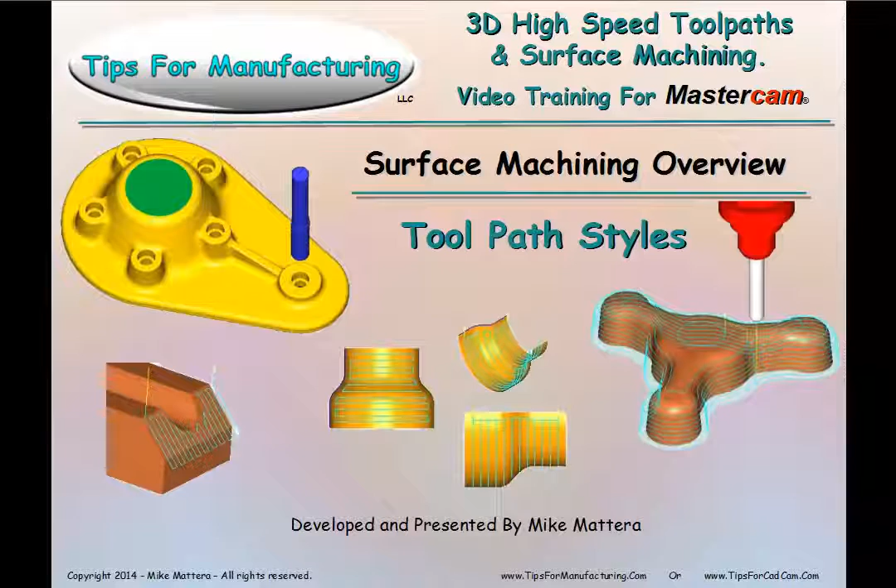We're going to start off with a surface machining overview, just to get you acquainted with the variety of toolpath styles. People often ask me, how do I know what toolpath to use? Really, variety is the key. You need to become acquainted with your choices.

See your part as a group of patterns. Look at the sample files that come with Mastercam. Most people don't install them, but they're the best way to learn about the new features in Mastercam. A great thing is, you can copy those sample operations into your part and then just reselect the surfaces.

So to find these toolpaths, we go to Toolpaths, Surface High Speed, and this is really broken up into two areas. First, we're going to talk about the roughing. Rough cuts remove the bulk of your stock.

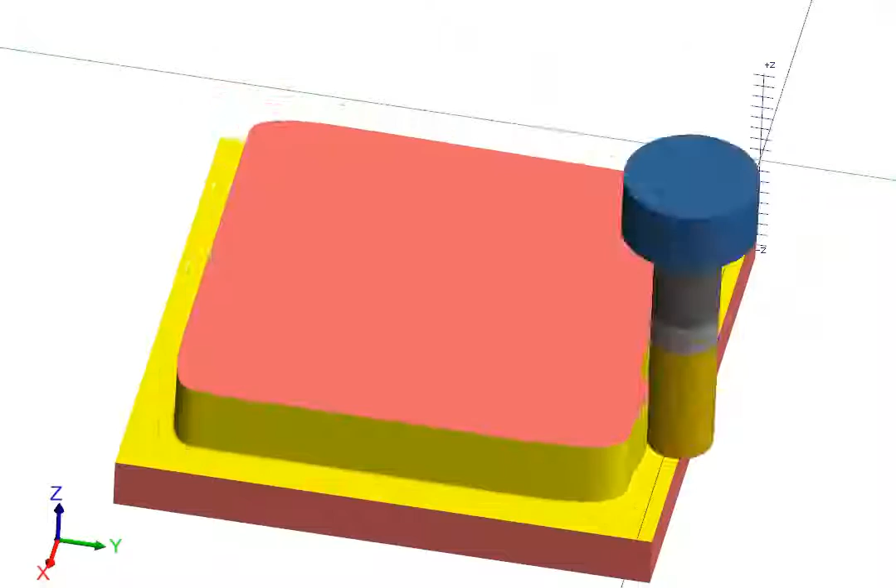Core roughing leaves a boss or a core standing up. It cuts from the outside to the inside. Area roughing is a cavity or pocket type milling. Rest roughing mills the remaining stock, getting the rest of the material.

OptiCore is like core, but optimized for machining efficiency. OptiArea is like area, but optimized for machining efficiency. OptiRest, same thing. The next area is for surface finishing.

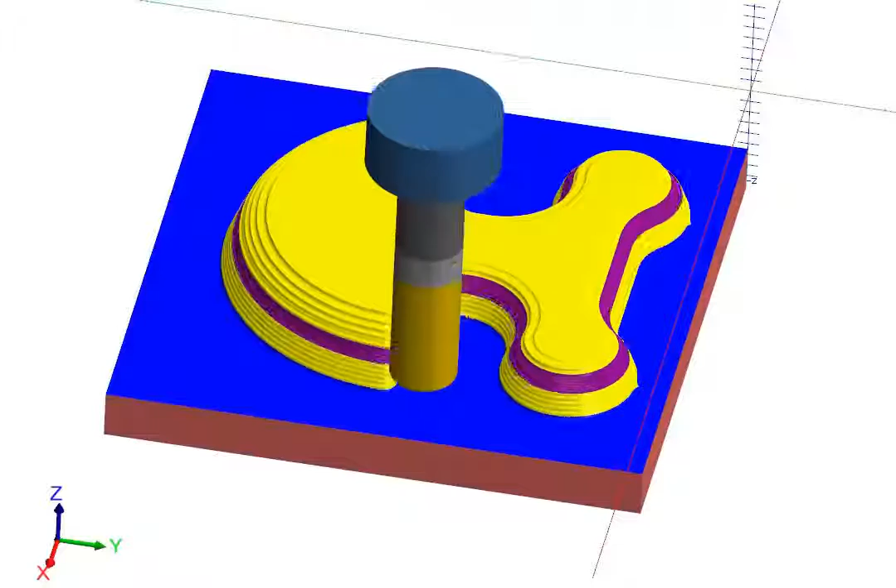Finishing cuts will smooth and blend the part. The first one is waterline machining, which is Z-level contouring. It's best used for walls that are nearly vertical.

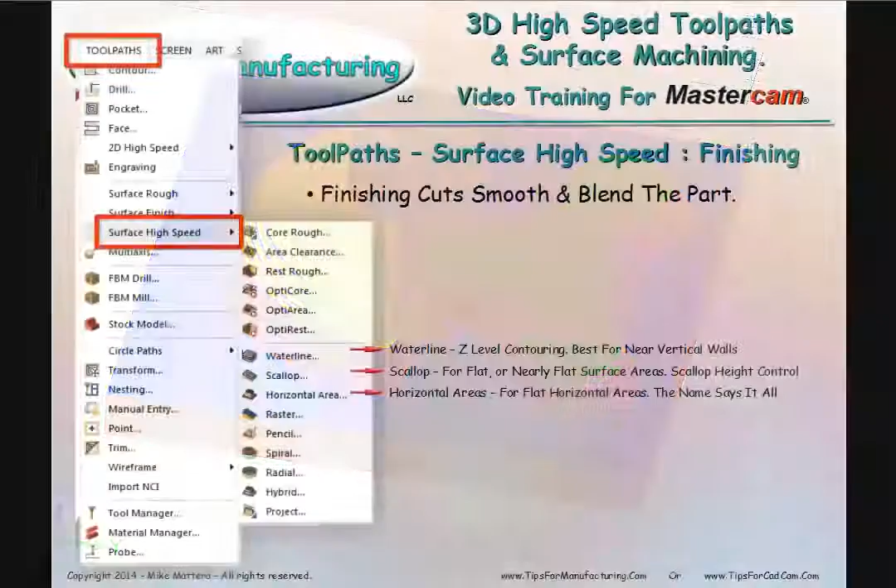Scallop is for flat or nearly flat areas, and you have complete control of the scallop height. Horizontal areas are for flat horizontal areas. They only do flat areas.

Raster makes parallel cuts across the surfaces. You control the angle of the cuts. Pencil is for tracing out or cleaning the areas between surfaces.

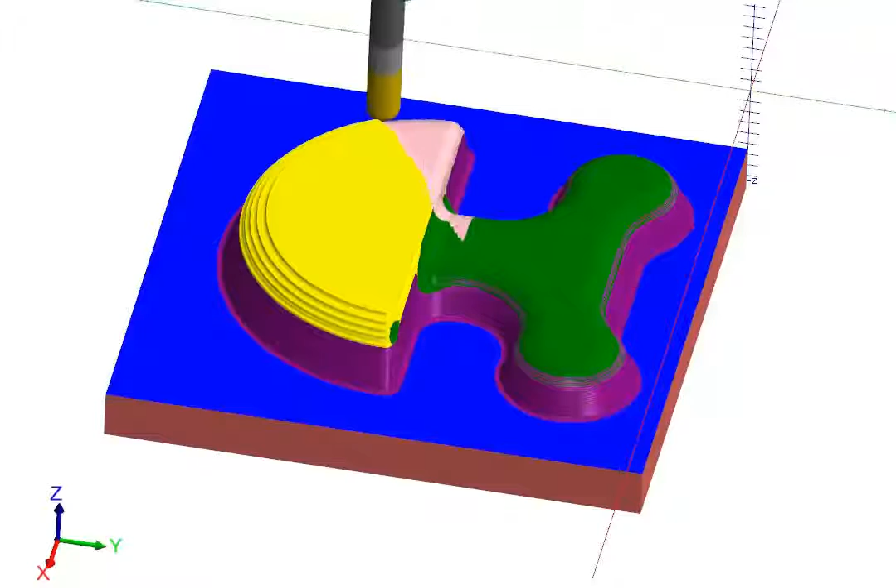Spiral is excellent for dome-shaped parts or areas. It creates a great-looking tool pattern on the part. Radial is a spoke-shaped toolpath. Think of it like the spokes in a wheel. It cuts from a center hub out.

Hybrid is a combination of toolpaths. Think of it as being scallop for doing the tops and waterline for doing the walls.

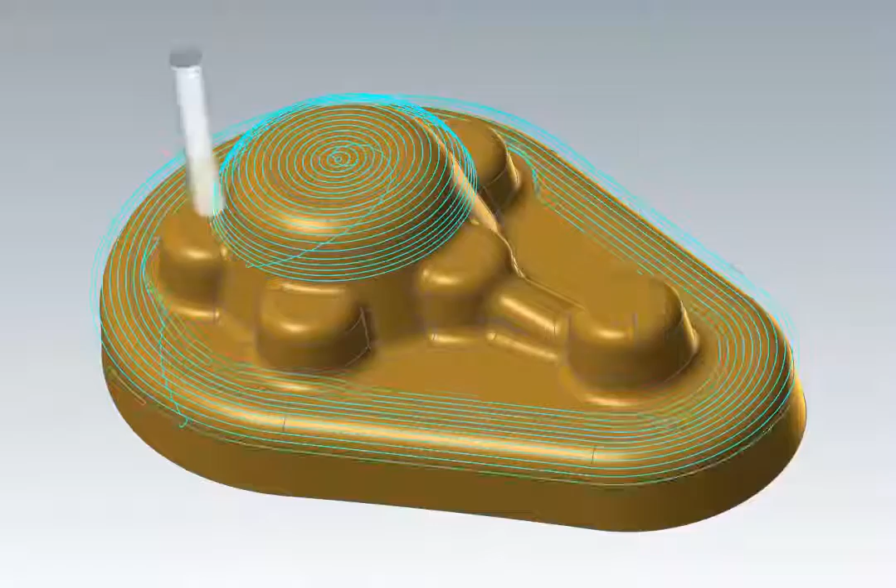And then we have project. A lot of people will say project, but that's because the English language can be pretty messed up sometimes. So this is project, as in projecting a 2D toolpath onto a 3D surface, or as a film projector would project an image onto a screen.

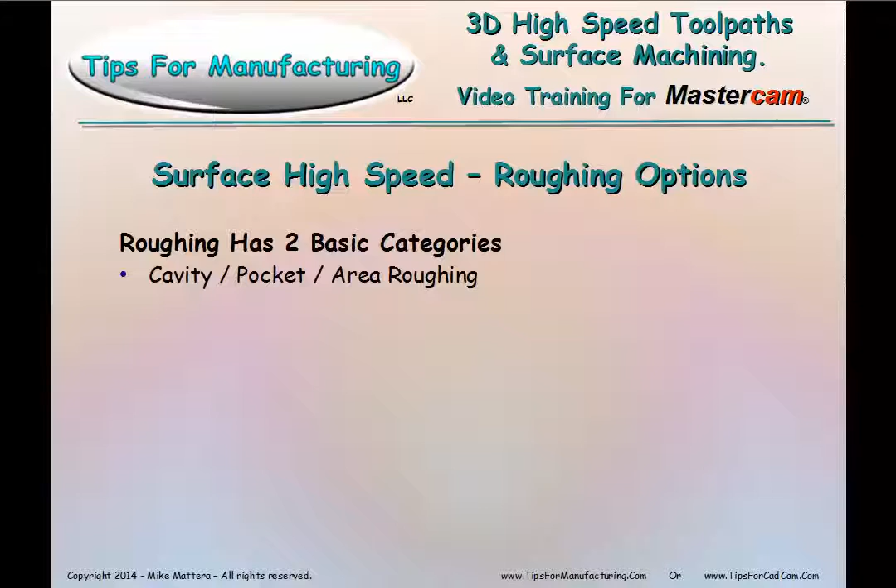So let's talk about these roughing options. Roughing has two basic categories. You have your cavity, pocket, area roughing, and then you have your core and boss roughing. That would be where you're leaving something standing, as opposed to cutting a cavity.

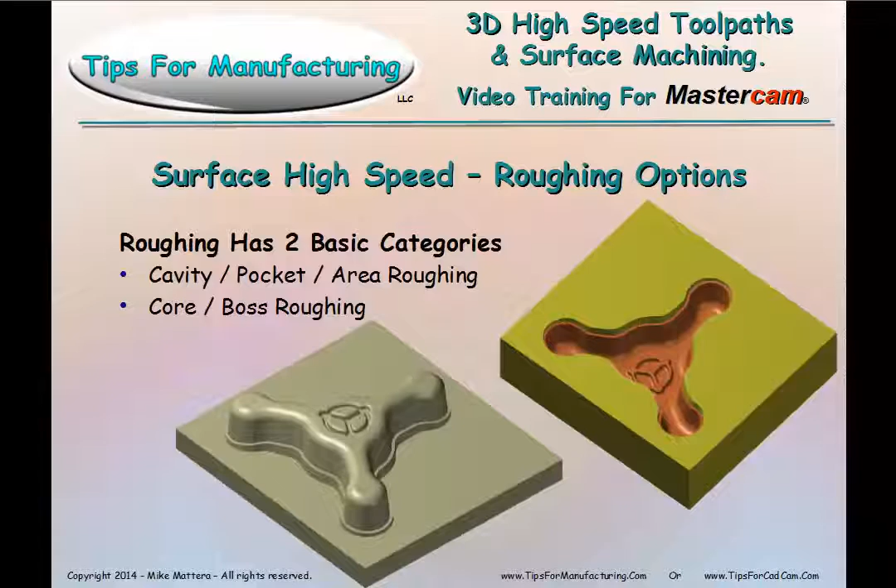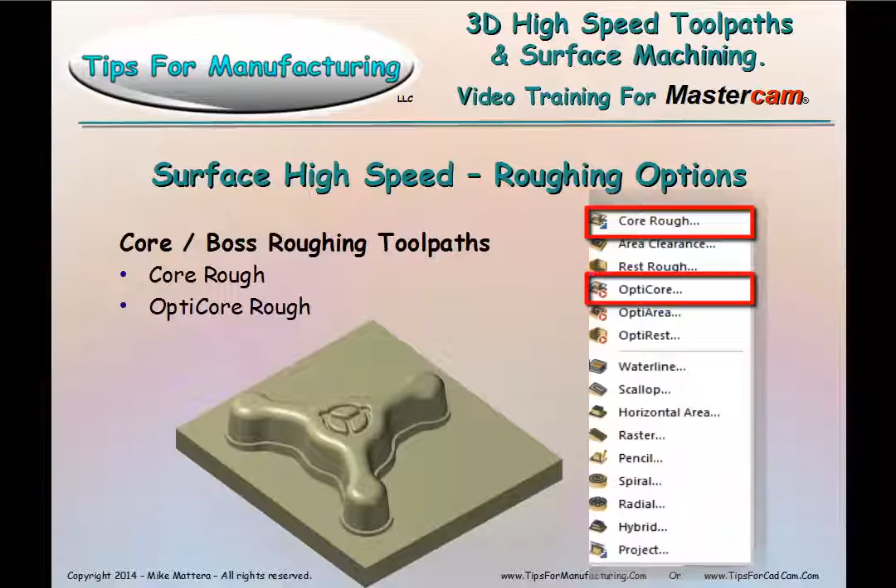So with the core or boss roughing toolpaths, we can pick either core rough, or we could pick OptiCore rough. We also have OptiRest for getting out the rest of the stock in some of the nooks and crannies.

Then we have cavity, pocket, or area roughing toolpaths. For those, we have area clearance, and then we have OptiArea rough. And of course, OptiRest, because OptiRest will work whether it's a cavity or a core.

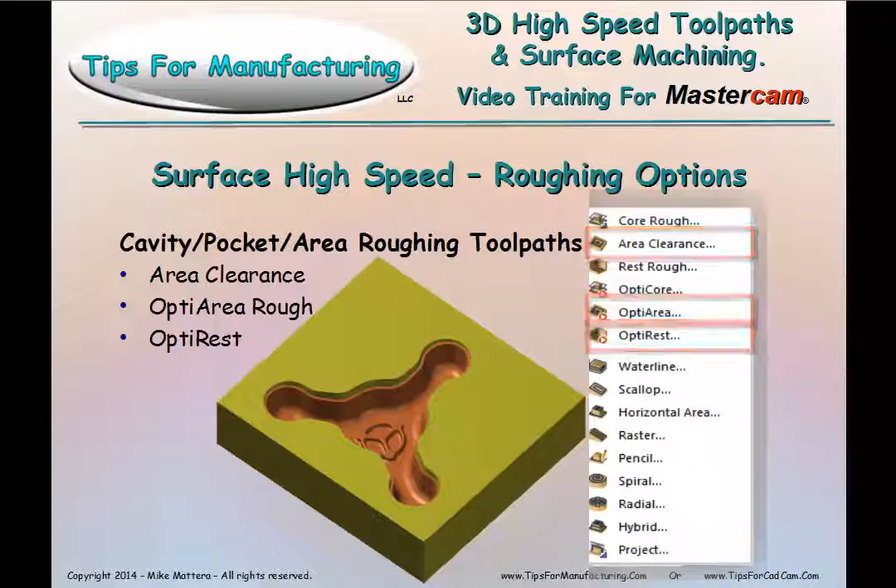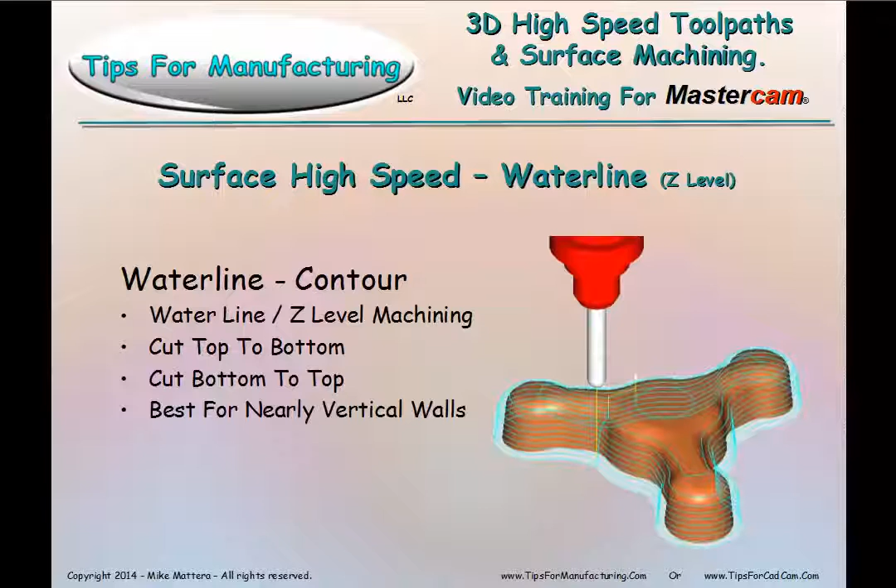For the finishing toolpaths, we have high-speed waterline, which is a Z-level machining, so it's a waterline contour cut. It cuts from top to bottom or from bottom to top, and it's best used for nearly vertical walls. It also gives you very good boundary controls.

Then we have the scallop toolpath. Scallop gives you cusp control. You control the height of the scallop. It has equally spaced cuts and gives a very improved surface finish. It's best for free-flowing surfaces and tops of surface areas.

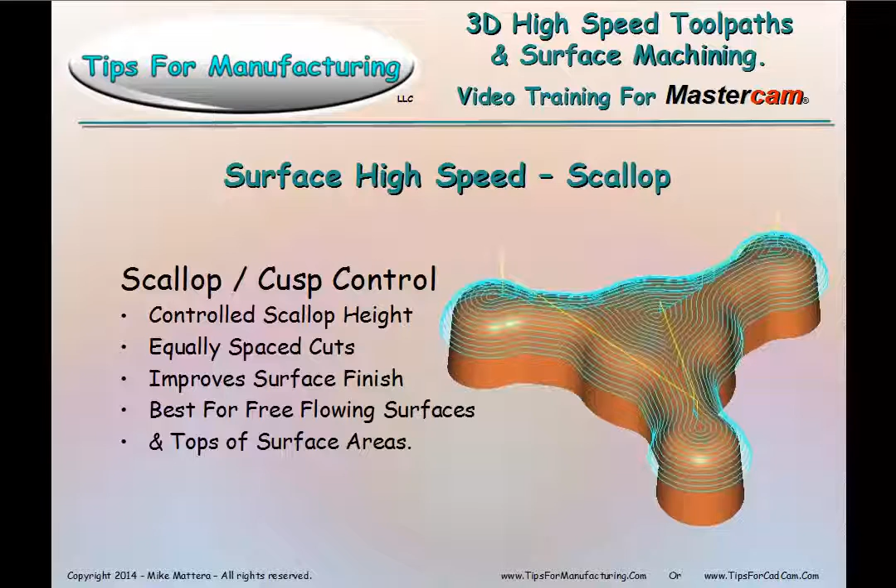Horizontal area will face off all the flat areas on the part. You get an equal cut spacing, and it has very good boundary control.

This is raster. You might also refer to this as parallel. It's an equal space cutting. It works on a grid or a parallel line cutting. You control the cut direction. It has high-speed transition capability, and you have boundary control.

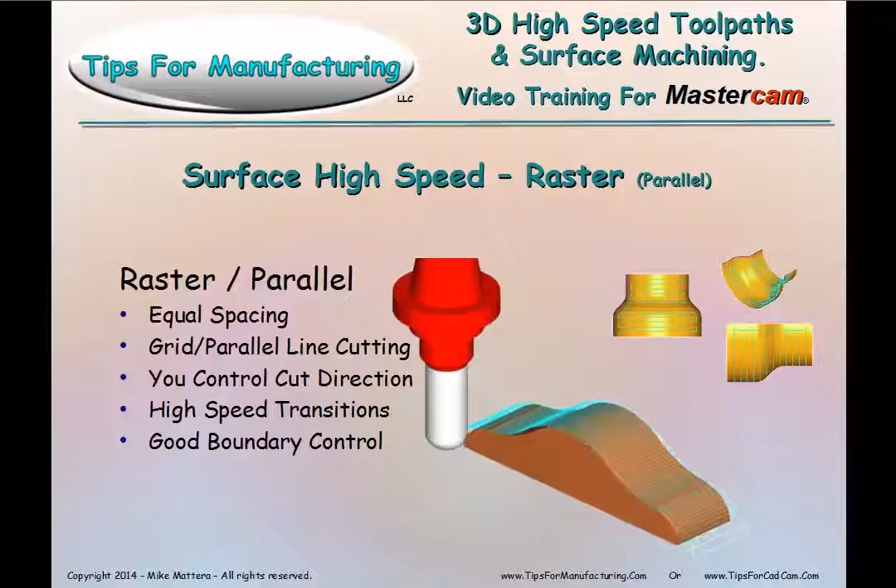Pencil traces the intersections. It's used to clean the corners between surfaces.

Spiral creates a scroll face type of a cut. It's a continuous cutting motion based on an equal spacing. So you specify a minimum start radius and a maximum end radius, and you can also use boundary controls with this.

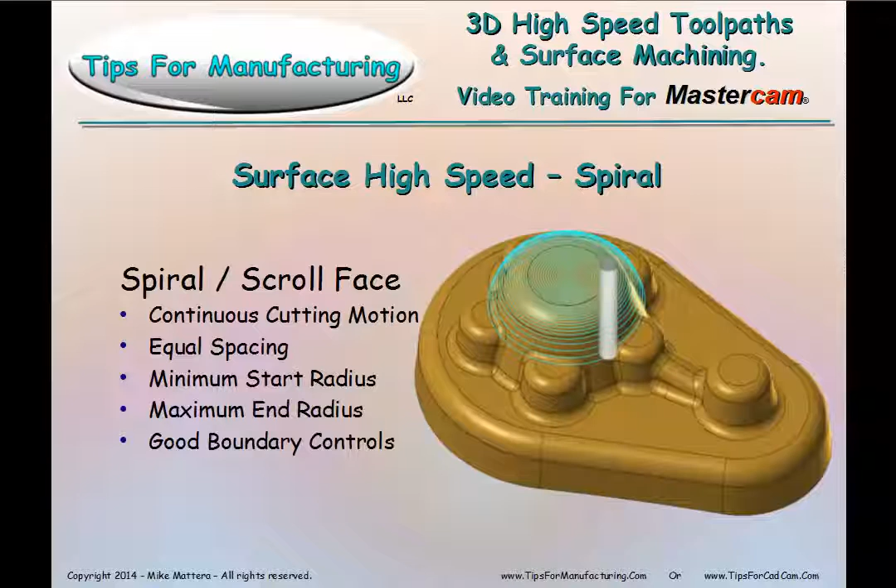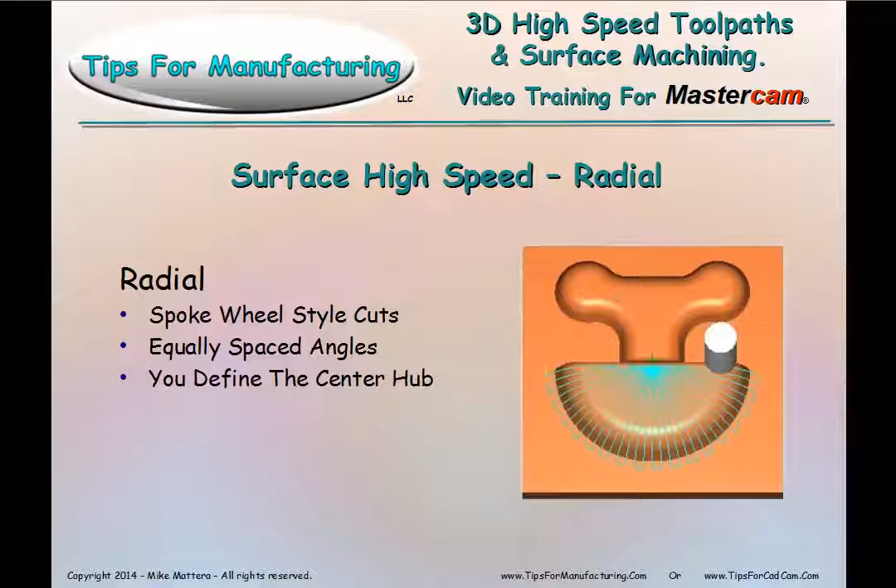Radial is a spoke wheel style of cut. It uses equally spaced angular cuts, and you define the center hub, and it also has very good boundary control.

Now this is project. In this example, they're projecting that V8 logo down onto the surface of the part and using that to create the toolpath. So this drapes 2D paths over 3D surfaces, and it's not limited by surface directions. You can engrave basic curves onto a surface.

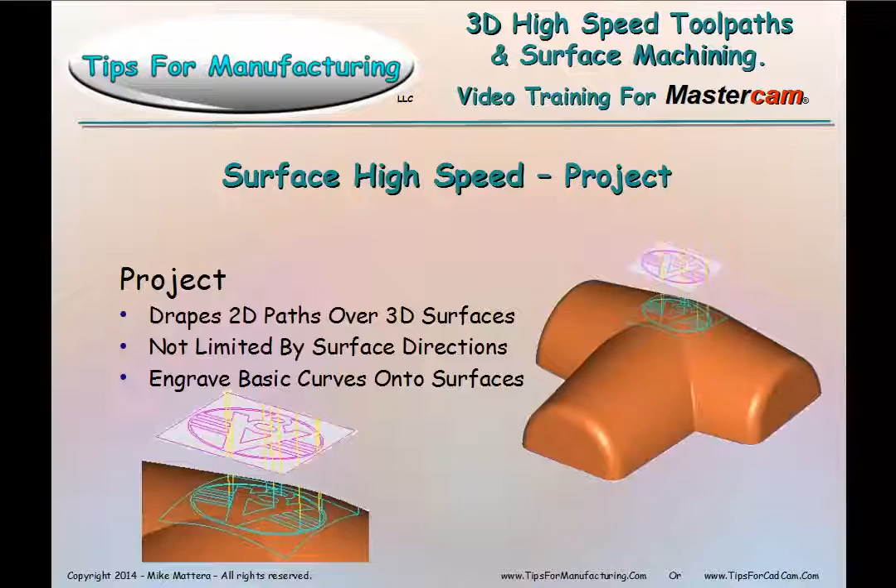But another one is the surface finish blend. This is actually in a different category of toolpaths. It has some flow line capabilities. You drive the direction controlled by your curves.

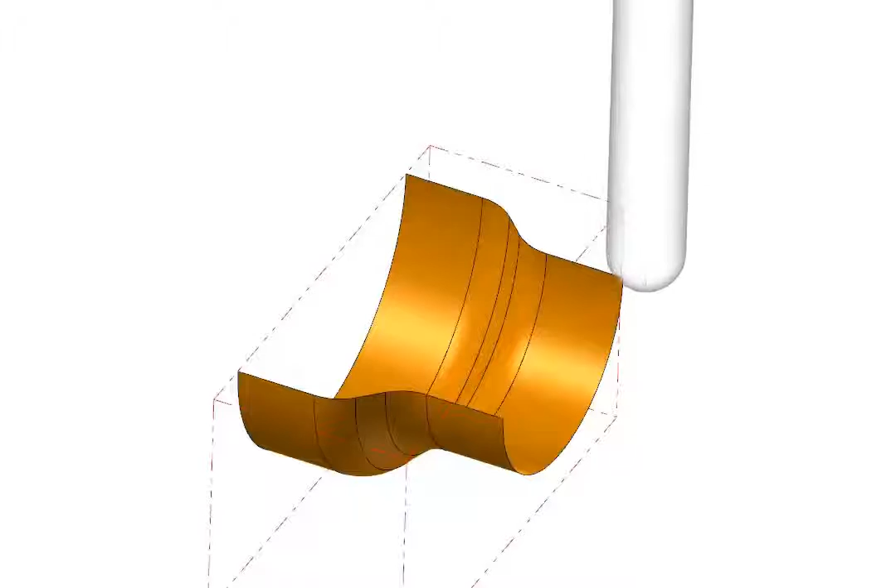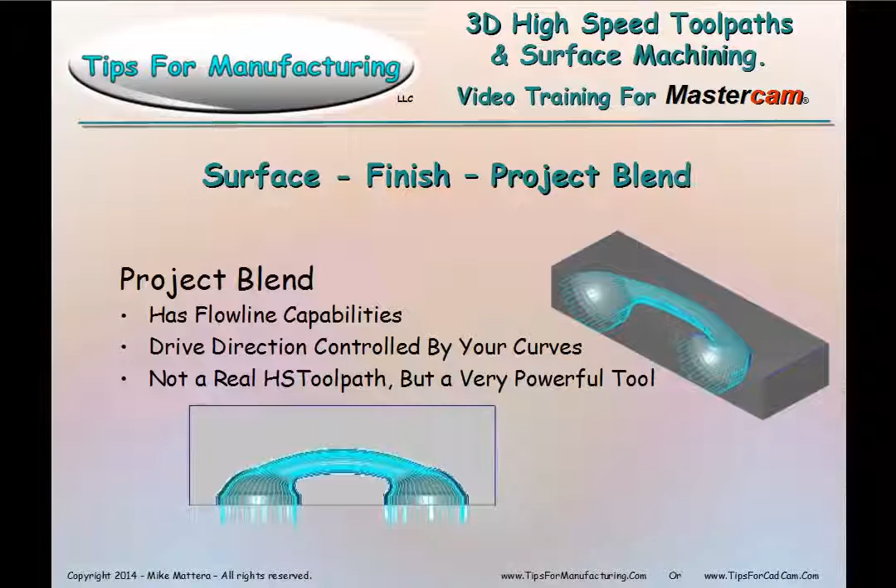So the curves that you select to define the profile is what helps the toolpath to flow in the direction of the cavity. It's not a real HS toolpath, but a very powerful tool. You'll find that under Toolpaths, Surface Finish, Blend.

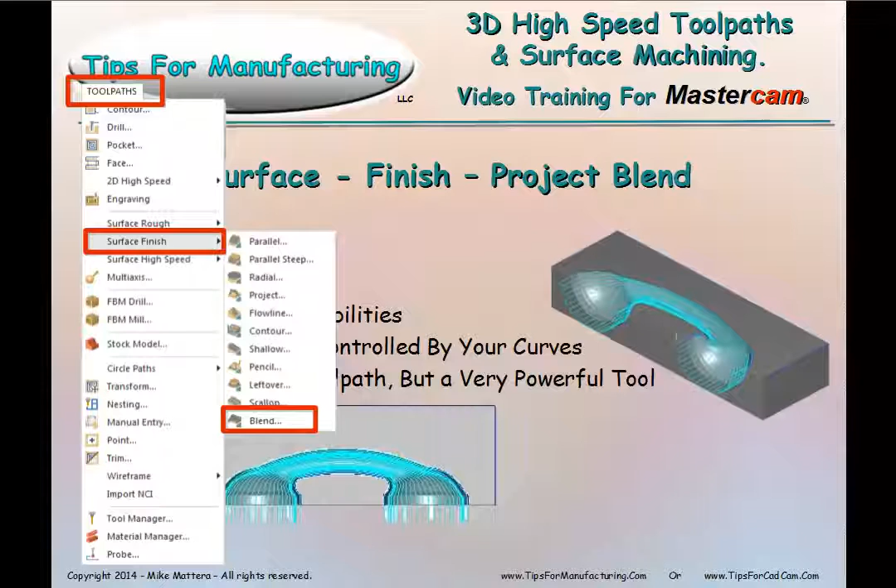So the key is to visualize your toolpath. Look at your part, think about how it flows, and after seeing these toolpath options, you should have a better idea which ones will fit the geometry of your part.